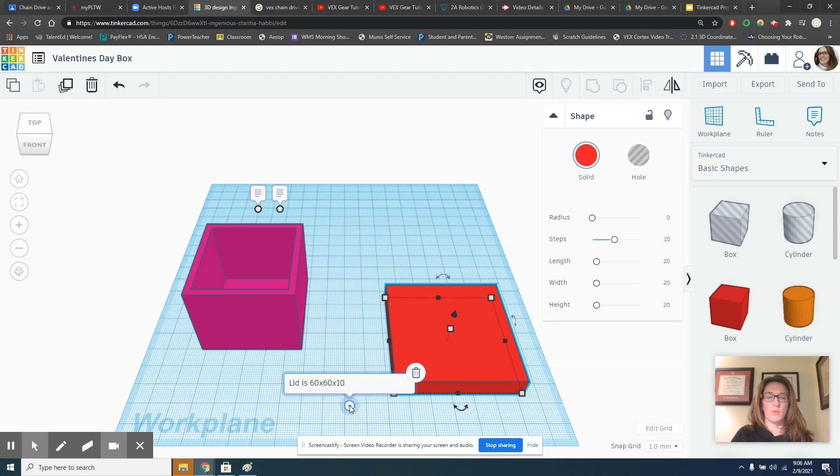And then we're going to adjust the height to 10 millimeters. So just remember that the lid, this note right here, is 60 by 60 by 10. And just to note, the unit is millimeters - sorry, I don't know what happened to my brain right there.

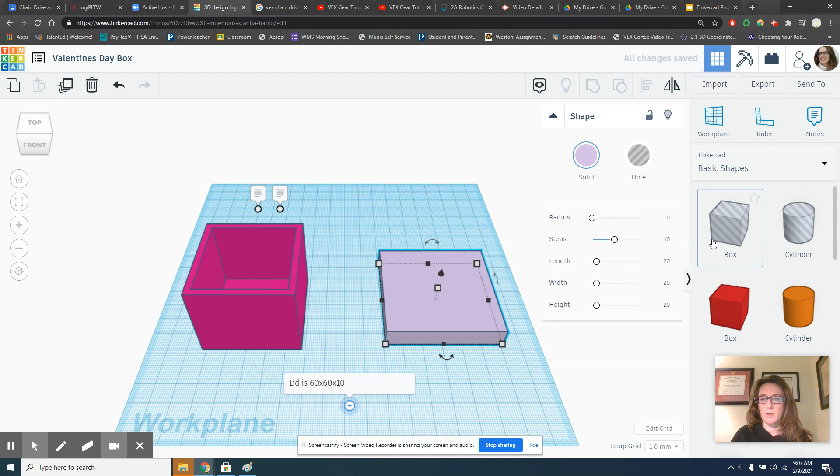So you dragged out a box shaped hole, but you can make any shape into a hole by dragging it out and choosing hole. Actually, we want a solid, right? And then I'm going to make like a lavender colored top, or maybe a light pink. Just because you have your design in light pink doesn't mean it would 3D print in light pink - the 3D print comes out in whatever color filament you choose. So you could make this all rainbow colored and it's going to print out in one color.

Like I said, we are not going to necessarily print these designs. I might print a few just so you could see examples, but we're not going to print out everybody's box. Okay, so there's the lid. Now let's flip the lid over. It doesn't look much like a lid, it just looks like a slab.

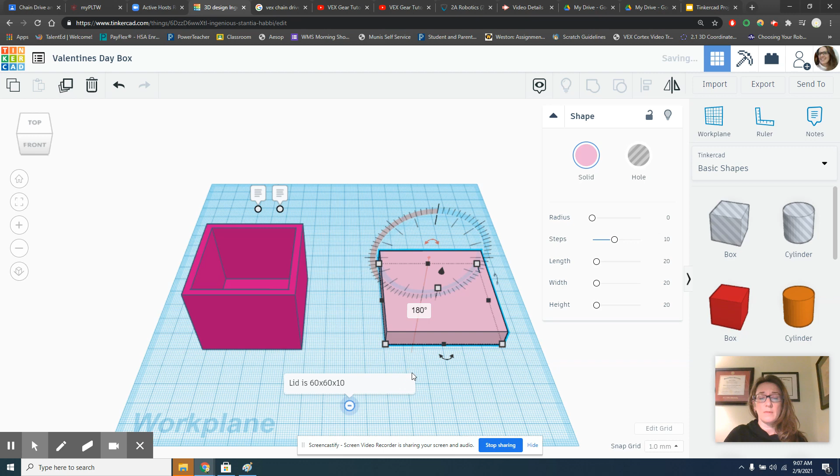And really, if you left it like this, it would just sit on top like a book, like you just laid the book on top. So that's not really what we want to do. We want to make this lid actually fit nicely on top. Remember, the outside dimensions of this box are - if you forget, you can always look at the notes that you wrote.

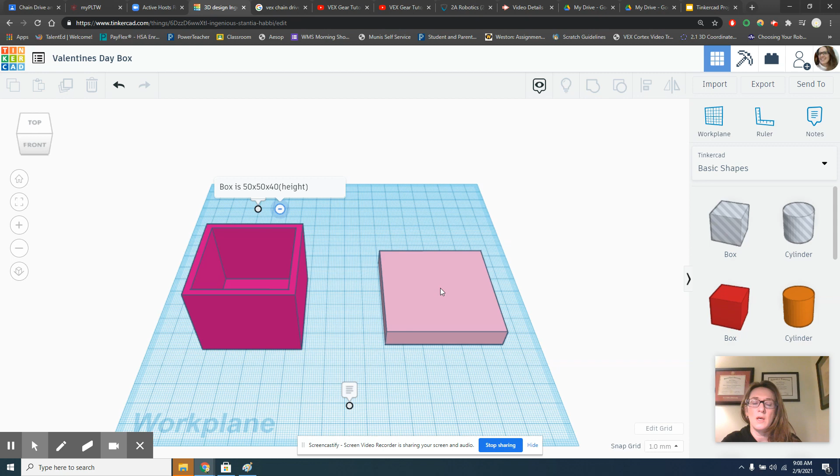Okay, the box itself is 50 by 50 by 40. So we need to make sure there's a hole in the box that's at least 50 by 50. We want to give it a little bit of room. The tolerances, which means the variations in actual dimensions of a printed object, are a little bit not as precise - these are like home 3D printers, not precise industrial 3D printers.

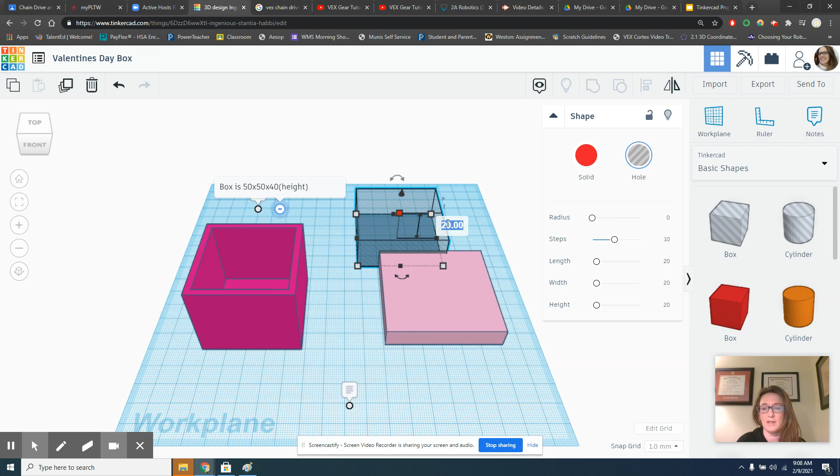So we're going to make this just a little bigger, let's say 52 by 52, so it gives about 2 millimeters of space on either side. You might decide that that's too big. And then it's going to be a very solid box. Our box lid is 10 millimeters in height, so we're going to make it 7 millimeters in height.

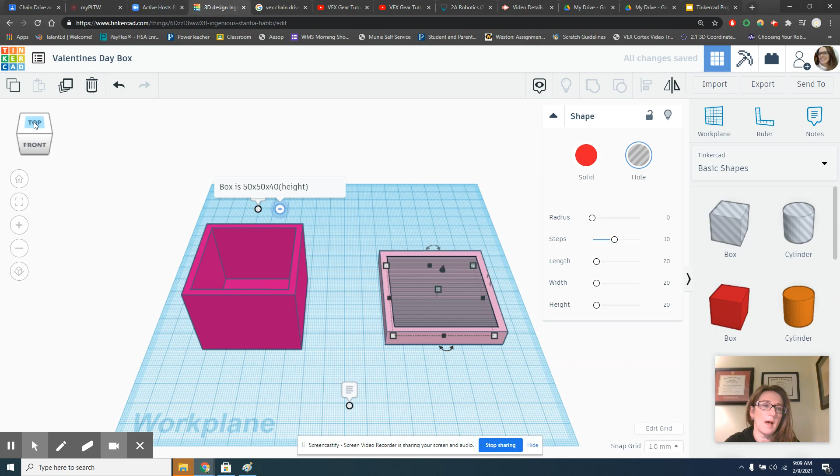And we're going to lift it 3 millimeters off the ground. I'm going to put this here. We want to align the whole thing, right? So what I did to do the alignment was I selected everything and then used the align tool, and I just aligned it so it will center it.

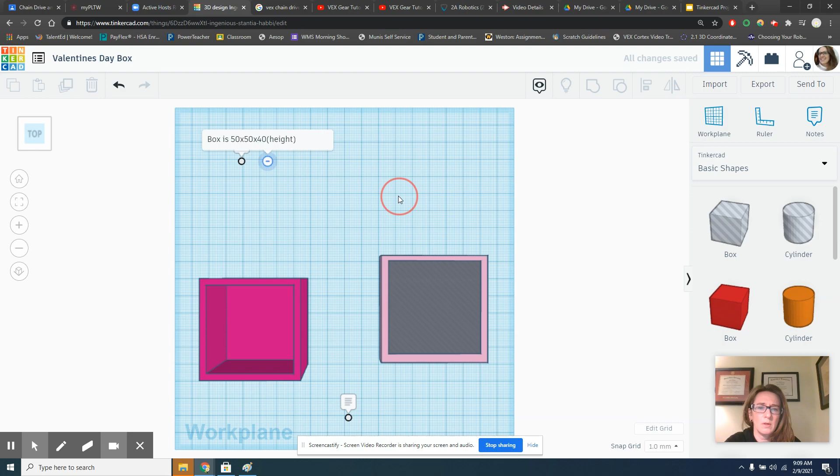There we go. Okay, so this is not a hole yet - you can see here, it's still a solid object with a hole kind of superimposed on top. The way we get them to merge together into one object is we use the grouping tool. And now we can see that this is a nice hollow lid. So if we flipped it over, I could put it on top of the box and it should fit pretty nicely.

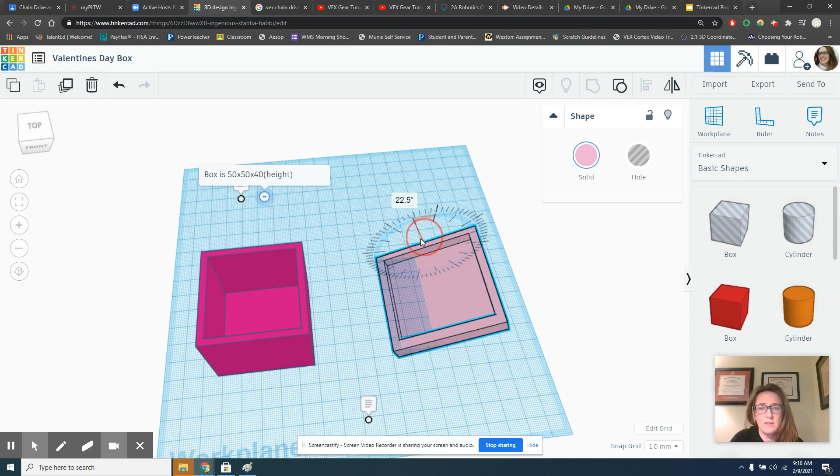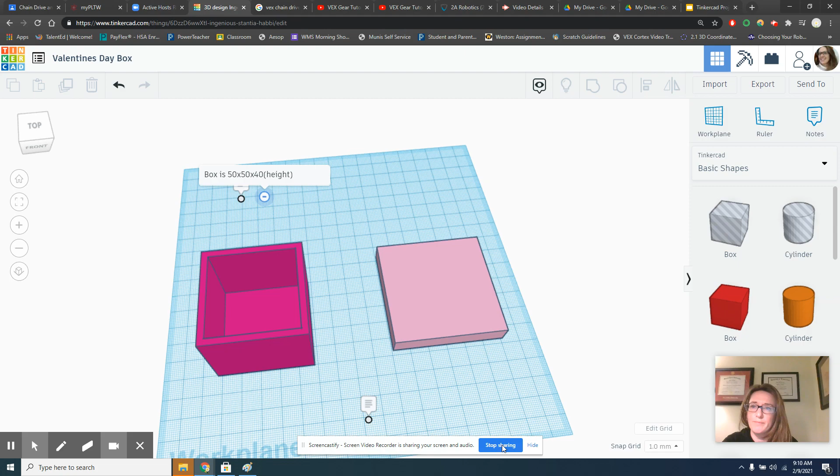So what we are going to do is flip it over, using the top rotate tool, 180 degrees. Again, you can just type in the number here instead of wiggling around, make sure it's exactly 180, otherwise it won't be perfectly flat. Okay, so that's this part, making the lid. And in the next video, we are going to make the design on the lid.